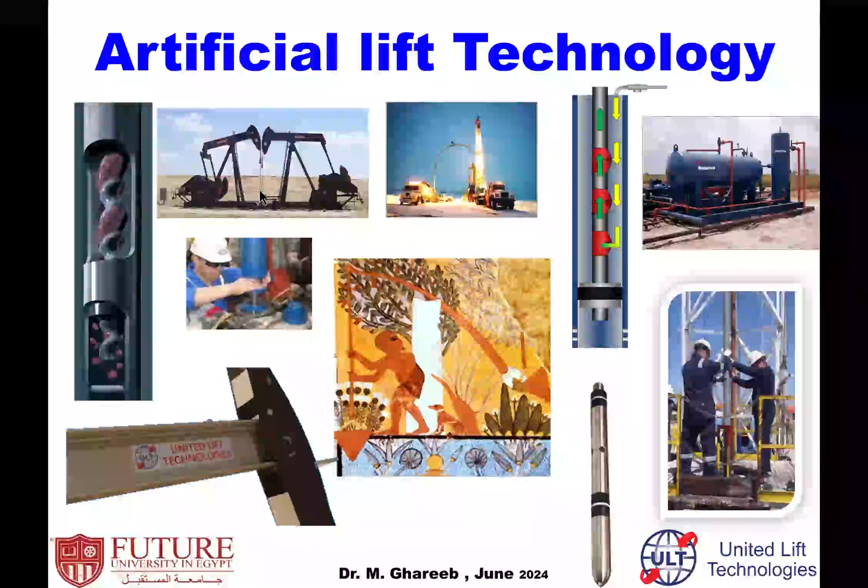Will I just continue from starting? Sorry for what happened yesterday about the power, getting disconnected and so on. Today we'll try to continue from where we stopped yesterday about one of the major forms of artificial lift. We said yesterday we plan to cover most forms of artificial lift systems. Yesterday we covered the first two, and today we plan to cover some basic general information about gas lift.

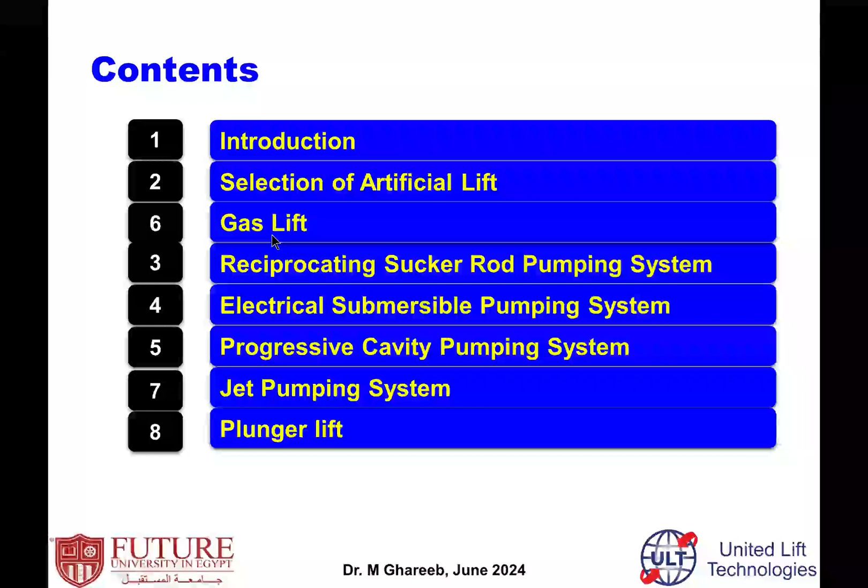If you are aware of this or know this, you'll be able to understand gas lift very well. Gas lift currently, as I said before, started to be one of the major artificial lift methods after the application in unconventional fields, especially deep fields, high gas-oil ratio wells, and so on. Artificial lift, specifically gas lift, started to be one of the most economical artificial lift methods for this type of field.

Yesterday we discussed what gas lift is and how it works, and how you start thinking about gas lift. It is one of the major artificial lift forms, especially for certain applications and certain areas. If gas lift is working for the well, it can be the most economical artificial lift. You can consider gas lift an extension of a flowing well. If you look at gas lift, it behaves like a flowing well, but with some artificial interference from your side to keep the well flowing.

Yesterday we said that for the well to be flowing, you must have bottom hole pressure capable of lifting the hydrostatic head of the fluid inside the tubing, inside the well, up to the surface. Plus, you need to overcome the wellhead pressure, a certain value of wellhead pressure, for the fluid to move from the wellhead to the facilities, whatever facility you have.

In some areas the facility is far, and there is plenty of oil in the fields, and the outlet pressures can reach more than 300, 400 psi. Then you need to have that value, plus all the pressure loss you have downhole from bottom to the surface. If you overcome these three items, then the well can flow. But in this case, it will flow artificially by using natural gas.

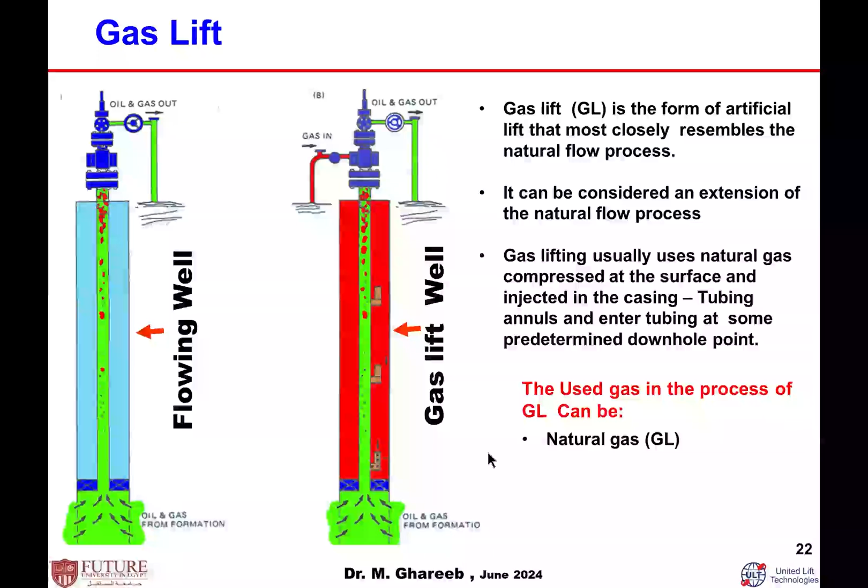What type of gas is used for the gas lift system? In general, the majority of wells use natural gas, either produced from this well or some other wells, or if you have a gas field near you, you can use it. Sometimes if the wellhead pressure of the gas field near you is sufficient, you may not need compressors at the surface.

Some wells in some areas use air, plus sometimes for very shallow wells, it's not common, but it can be. The main idea is to have some sort of gas to mix with the fluids in order to help the well flow to the surface, and it can be a mixture of air and gas. However, let us focus on the first one: using the produced gas or natural gas, what we can find. This is one of the main important things to think about regarding how to use gas lift.

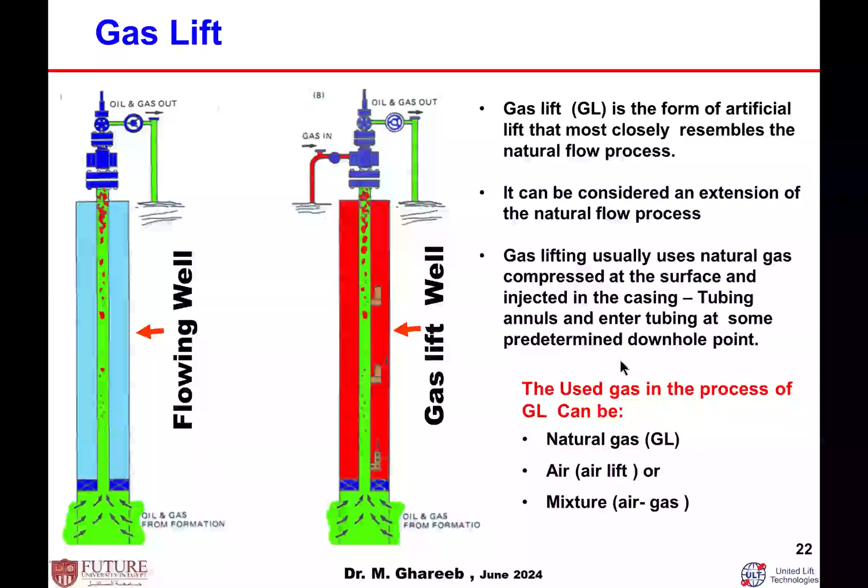In general, there is more than one type of gas lift, depending on the well, productivity, bottom hole pressures, how you want to produce the well, and the amount of fluids you have. In the market, generally speaking, there is what we call continuous flow gas lift, where you are continuously compressing and continuously injecting gas into the well. On the other hand, we have what we call intermittent flow gas lift, where you are injecting gas, stop, injecting gas, stop, and so on.

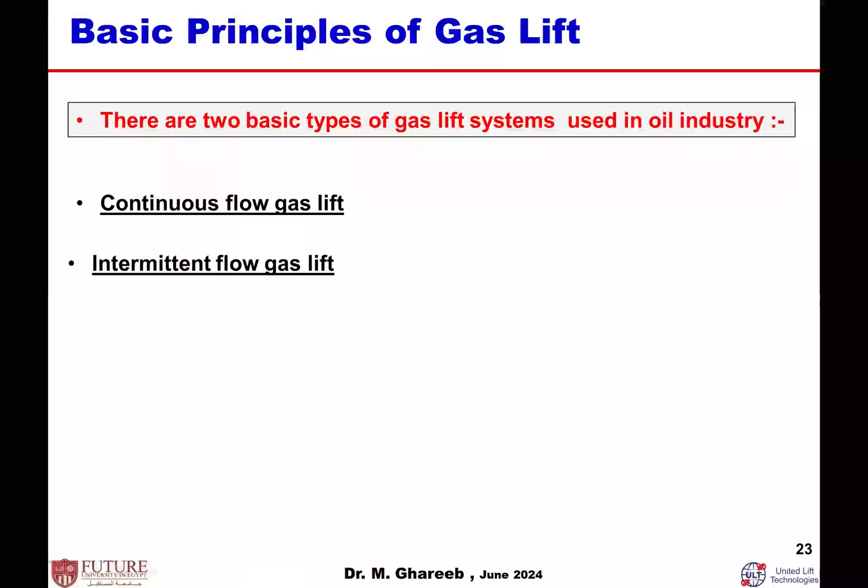How this type of technique or method works, I will talk you through. We have two types of gas lift systems: continuous flow gas lift and intermittent flow gas lift. What is continuous flow gas lift? How does the conventional gas lift, the continuous flow gas lift, work?

For the conventional gas lift, what we call continuous gas lift, as well as the other type, you are injecting gas from the casing. There are some cases where people inject from the tubing, but this is a different subject; let us focus on the principle. You are injecting gas, shown as the yellow arrow, in the annulus space between the casing and the tubing, and the gas enters the tubing through one of the valves, which I will explain, through a certain port, joining the produced fluids and lifting the fluid to the surface.

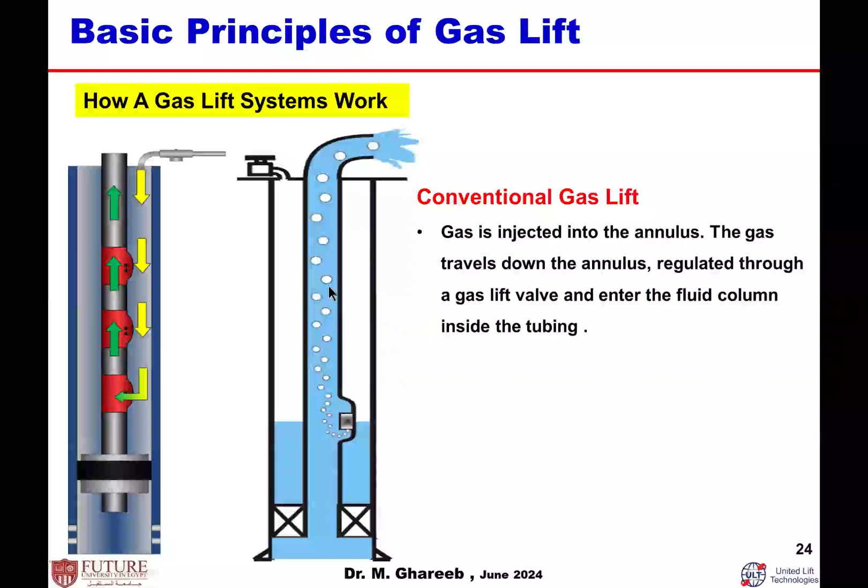If you look at this animation, usually in gas lift only one valve is open at a time, even if you have more than one valve in the well. The valve that is open is called the operating valve. If you are injecting gas in the annulus and the gas goes to the tubing through this port or valve, it joins the fluid in the tubing, reducing the hydrostatic head. One of the main purposes of that is reducing the hydrostatic head. There are also other techniques I will explain later for the gas lift, how to lift the fluid and produce it.

This is continuous flow gas lift. How does it work, again, in the continuous flow gas lift? The principle: we inject gas through the annulus, the gas enters the tubing through the bottom valve, joining the tubing flow to the surface. How is it working?

How is this simulated? How is fluid lifted? Only by reducing the fluid gravity, the density, the average gradient of the fluid, or what we have. This injected gas joins the formation gas or formation fluids, the produced fluid, to lift fluid to the surface. Usually there is one or more processes helping the fluids to flow from bottom to the surface. What is this process? First, the main idea and main concept in gas lift is reducing fluid density.

I have a fluid inside the well, for example water or oil, with gravity of the oil. If it is dead oil with API 40, the average gradient will be about 0.3 psi per foot. If I inject some gas and the gas mixes with the fluid, the average gradient will be less than 0.3 psi per foot. Then the hydrostatic head equivalent to the well depth will be much less. This is one of the main processes.

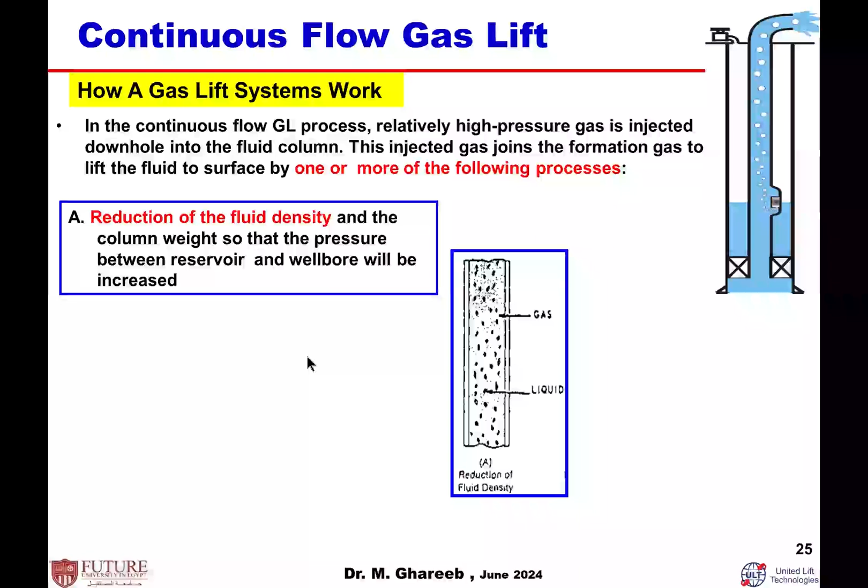What else? Yes, in the same wells, especially high gas ratio wells, deep wells and so on, this gas when it starts to travel upward, the bubble of gas starts to expand. When the bubble of gas expands, the expansion of the injected gas pushes the fluid, pushes the liquid ahead, up. Usually the gas is moving up, not down. Then when the bubbles of gas start to expand, it pushes the liquid or fluid up further, reducing the column weight more and more, helping fluids to move up.

Is there some other technique or process? Yes. Not only that, but as the gas goes up, the pressure decreases, and when the pressure decreases, the bubble of gas or slug of gas starts to expand, starts to get bigger and bigger. And when we have a big slug of gas inside the tubing, this slug of gas makes displacement of all the fluid above it, so displacement of fluid is caused by the slugging.

In the same well, you can find one of these processes or more than one. For sure, the first one is okay - you can find just bubble flow reducing the density of the fluid, or bubble flow with expansion of gas. If the gas starts to move up with a certain velocity and starts slugging, then you can have more and more processes.

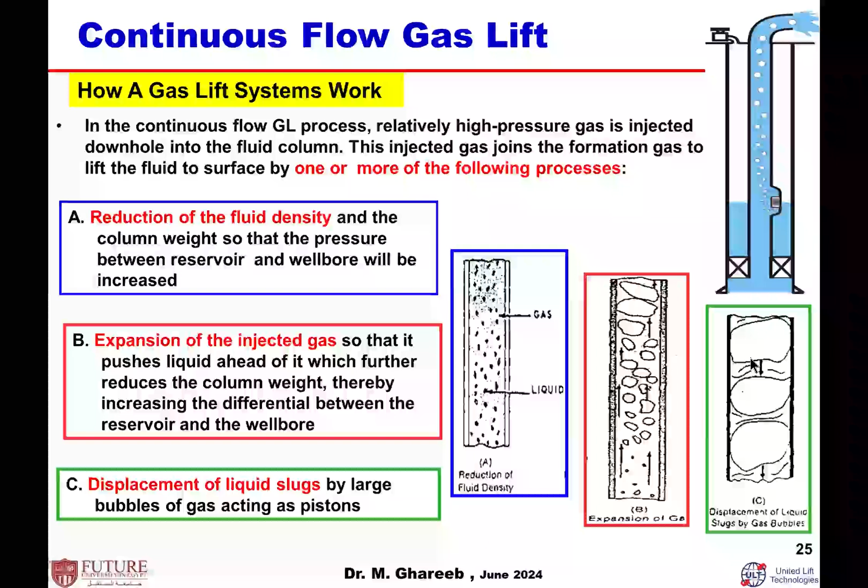Usually when you design the gas lift, you start to look at what's happening downhole for two-phase flow, because gas lift is an extension of the flowing well concept, since you're usually dealing with two-phase vertical flow for these wells. When we design with correlations, we know what process is happening in the well and how we can move from one process to another. If we want more than one process, we can control the amount of gas and pressure of gas going to the well and being injected. This is continuous flow gas lift.

We said that in gas lift techniques there are two techniques: continuous flow and the second one is intermittent flow. Continuous flow is used for high production wells, for wells producing continuously with good productivity and so on.

What happens if I have a well with low productivity? These wells only produce a very low amount of fluid, and this fluid cannot reach the surface. But the well is capable - the fluid inside the well has fluid gravity, viscosity, and so on. The design says yes, gas lift can work in that case. In this case, you stop the well and allow the well fluid to accumulate at the end of the tubing.

If you stop the well, there is a technique called build up. The well starts to build up - building up the fluid at the bottom, because the fluid is heavy. Fluid at the bottom, as a pre-designed amount, a head of fluid will be in the well. Then we know, when the fluid is built up at the bottom of the well, for example 100 feet, 200 feet, 300 feet, I have to inject gas in the annulus to push that accumulated fluid up to the surface.

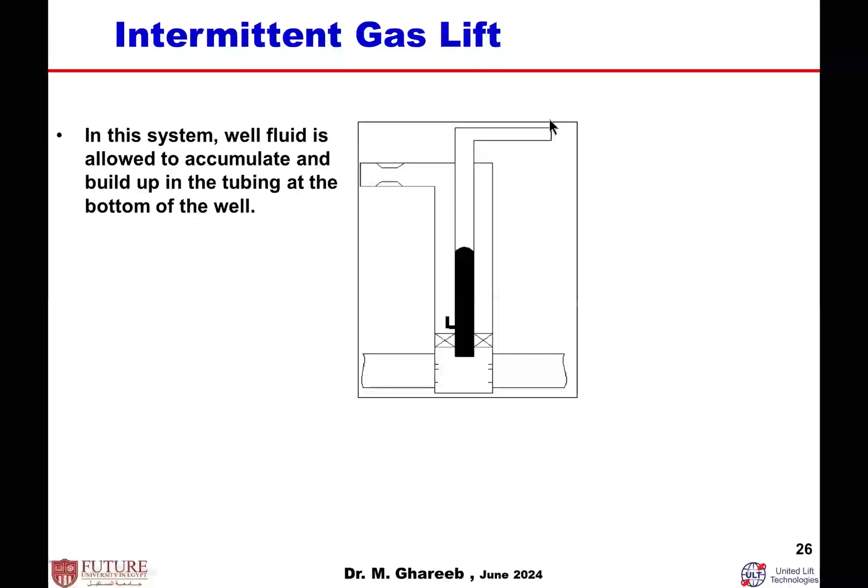When the fluid reaches the surface, the well is stopped, no gas injected, and there is fluid in the bottom of the well. When we have a certain amount of fluid in the bottom, I start to inject gas, the red arrow, inside the annulus, entering a certain valve at the bottom. This gas goes below the head of the column of fluid, pushing that fluid to the surface until it reaches the surface. There are valves there. Since the fluid reaches the surface, the well is stopped again. After I stop the well again, the cycle starts to repeat.

Usually, this type of intermittent gas lift is used for low production wells, low productivity wells. However, it's not economic, not efficient, because in most cases you have a lot of fluid slip back. When you are pushing gas, it's not working like a plug, it's a fluid, so the gas can move through that flow, and it's not very efficient. Sometimes it's used for shallow wells, low productivity wells, when other forms of artificial lift may not be economical. Sometimes it's combined with other types of artificial lift, like plunger lift, plunger assist. However, this is the second technique or process of the gas lift system.

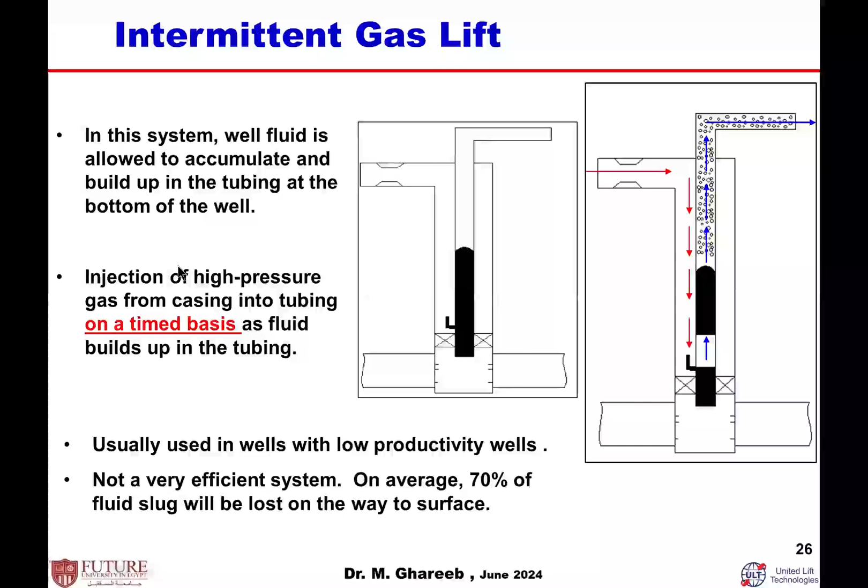This slide explains the process, how it works. If you look from the left side, at the bottom there is fluid just accumulated. At the surface, immediately before injecting gas, there is fluid in the bottom, so the surface control valve is closed. Then, after a certain volume of fluid accumulates inside the well, the surface control valve starts to open and allows the gas to be injected inside the well. The gas goes below the slug, and after the gas goes below the slug, it pushes the slug to the surface.

Second, during the injection operation, when the slug reaches the surface, there are sensors at the surface that say this is now the end of the slug or the gas. The plug moves from the wellhead. The surface control starts to close because the well is now completely filled with gas. Why keep injecting more gas? Because the fluid has already reached a certain depth or place in the wellhead, and since there is no more fluid, or the plug has moved, it is now only sensing gas. When this closes, it allows the well to be stopped. After the injection, when the well is stopped, the flow starts to build up again, and the cycle repeats. This is what we call intermittent gas lift.

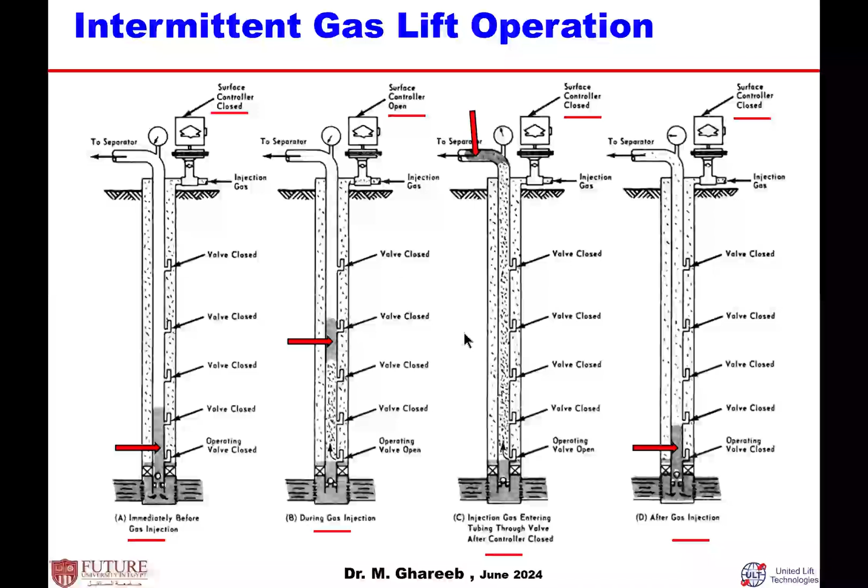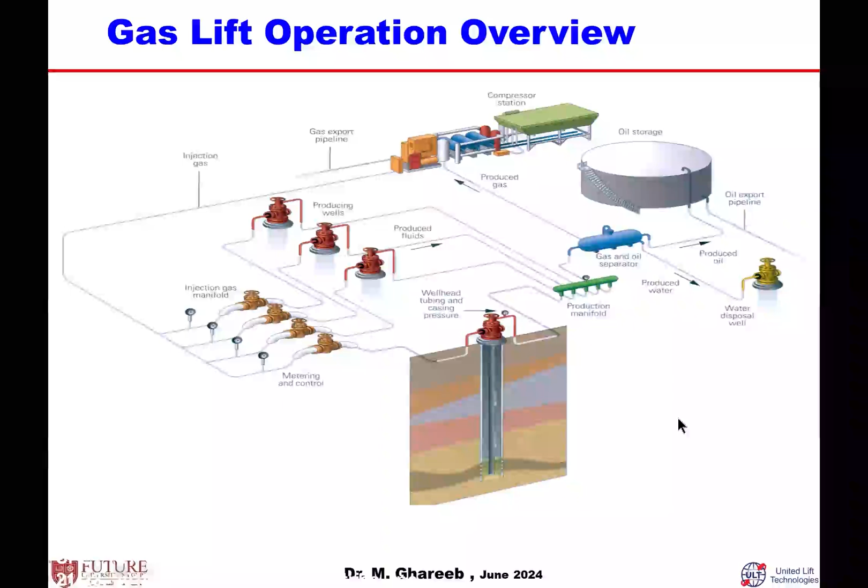Okay, based on that, based on why I use gas lift, based on what I mentioned about gas lift, for sure there are some advantages, some limitations, and some disadvantages of gas lift.

As I mentioned, the gas lift is an extension for the flowing wells. There are no moving parts, no moving equipment inside the wells. The gas lift can handle sand and whatever else, even deviated wells, horizontal wells, whatever type of wells. There are no restrictions inside the wells for flow to move in the tubing, because there is no mechanical movement.

Gas lift is a more flexible type of artificial lift for design rates. If I design the well for certain rates, based on well productivity, the amount of fluid, water cut increase or decrease, and so on, I can control the injecting volume and pressure of gas, and even the place and depth where I need to inject the gas, at what valves and depths. This gives more flexibility with gas lift.

For that reason, one of the main important things for gas lift is optimization. It really is one of the artificial lifts that requires continuous optimization and continuous monitoring of what's going on downhole - whether I use the gas at best efficiency, in the best economical way, and so on.

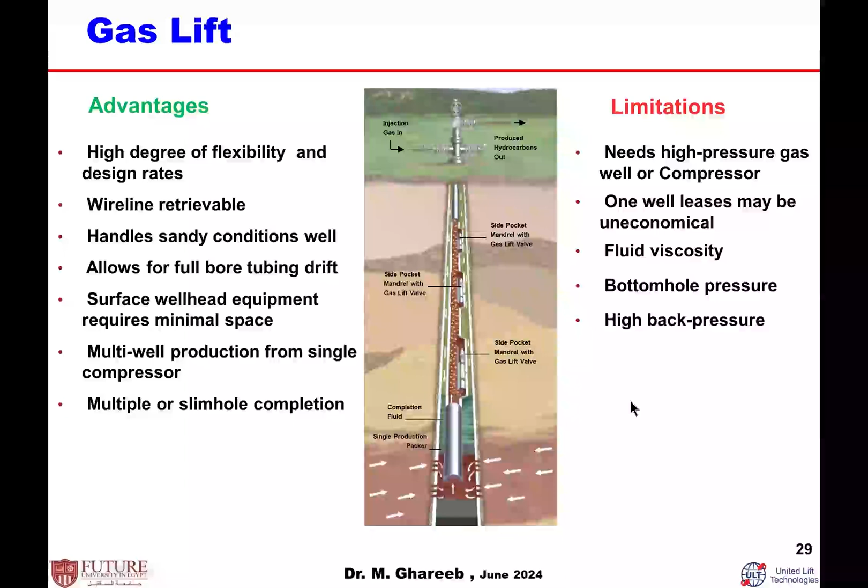What is the equipment used for gas lift? What type of equipment do we usually use to gas lift the well? Since I said we run this well with artificial lift, there must be certain equipment used to artificially lift that well, and for any type of artificial lift, that means we have surface equipment and downhole equipment.

For gas lift, what equipment do we have? I'll show you these slides to simulate what the gas lift setup is, what we have at the bottom of the well, and what we have at the surface.

For the gas lift components, what components do I have? What is the downhole component? Downhole means all the equipment in the well below the wellhead, down to the wells. Whatever I find in the well, we call downhole equipment.

What's the downhole equipment for gas lifted wells? Mainly, we have gas lift valves. Some valves, because I inject gas, but I need to have some control over where the gas is injected. Where do I need to inject the gas? I need to inject it at a depth of 1,000 feet, or 2,000 feet, or 3,000 feet, or whatever.

At what depth do I need to inject the gas? What volume do I need to inject? I need to have some sort of control, something to control the amount and the location of gas being injected downhole into the well. This is what we call the gas lift valve.

How is the gas lift valve installed inside the well? The gas lift valve, as shown in this picture, is just a small piece of equipment. It must be fixed inside the well, and at the same time it must allow the fluids and gas to communicate.

There is some sort of communication between the fluid in the annulus and the fluid in the tubing. This gas lift valve is installed in what we call a gas lift mandrel.

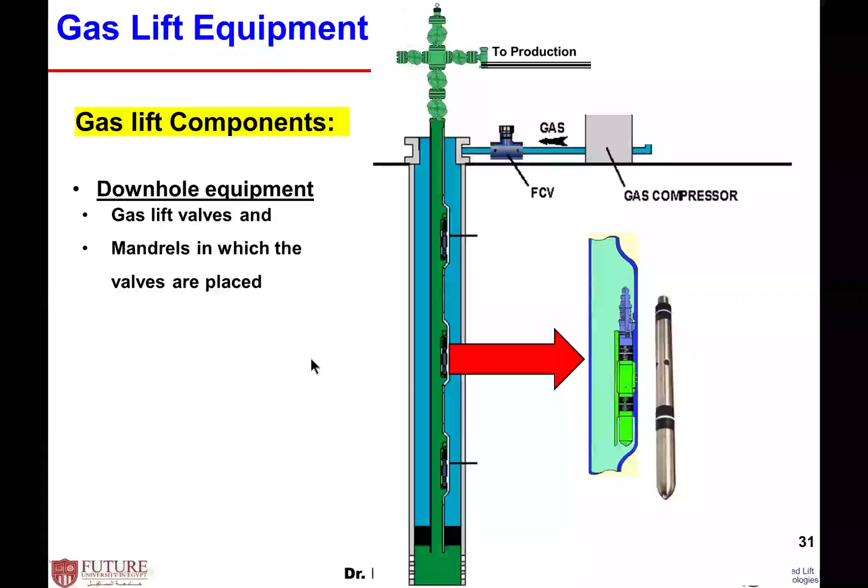In the downhole, mainly there are some accessories I can use sometimes in such oil wells and so on. This is gas lift equipment. I am not talking about completion now, I'm talking about the gas lift equipment specifically.

If you look at the gas lift valve with the gas lift mandrel, the red color represents the gas, this is the gas lift valve, and this is the gas lift mandrel, just zooming in on that one.

At a certain delta P pressure between the tubing and the casing, the valve opens, allowing gas to enter the tubing. When it enters the tubing, it makes the fluid lighter, lifting it, which was one of the processes I mentioned before. At the surface, remember we said I must have a control.

I must have something to control whether the well is open or stopped, the volume of gas, the pressure of gas being injected, and so on. Then I need to have a compressor or high pressure line.

The compressor or high pressure line usually isn't just for one well. A compressor, most of the time, serves a couple of wells or more. However, I need to have a source of high pressure gas. High pressure gas comes from a line, from wells, or from compressors that compress the gas to give me gas at the wellhead with a certain pressure value.

Plus, the wellhead for gas lift is very simple. It's just a Christmas tree and so on, plus control valves or whatever, just to control flow and control pressures and so on.

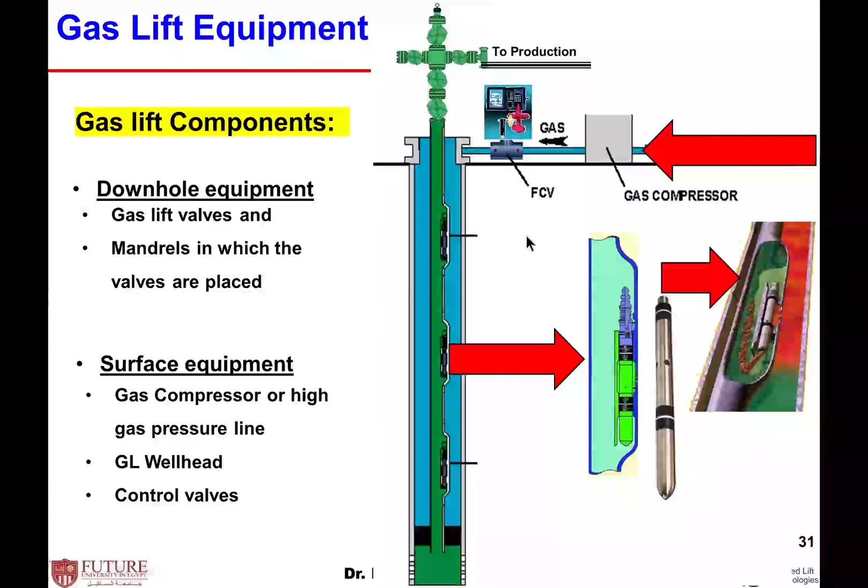Let us focus a little bit more on valves, gas lift valves and gas lift mandrels, and why we need a gas lift valve. This is a cross section of the mandrel with the valve installed inside it. We need the gas lift valve to provide communication for the fluids between the fluid in the annulus and the fluid in the tubing.

I have to communicate between the fluid in the annulus and the fluid in the tubing, with control over when it's open, when it's closed, when I need communication, and when I need isolation to stop it. The valve controls the flow of injected gas into the production tubing. I need to inject gas at that depth or stop, inject at that depth or not, or deeper or shallower depths.

The valve operation depends on a preset opening. Since the valve is controlled, I have to preset it in the workshop using certain techniques, which I will show you later. The valve should open if the pressure in the annulus is higher than the pressure in the tubing by a certain value, and should close if the pressure is low. If the pressure rises further, the valve should open or close accordingly. This opening or closing is based on the preset in the workshop.

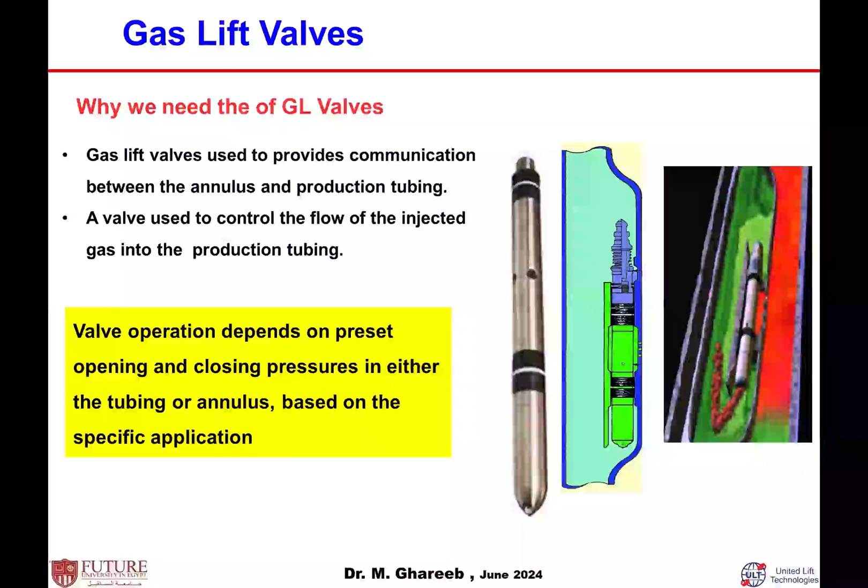If you have a delta P across the valve from the casing and tubing, you need to open or close. So the valve operation depends on preset opening and closing pressure in either tubing or casing, based on the delta P from casing to tubing or tubing to casing. There are different valves and different techniques for using this.

Each gas lift well or gas lift completion will have more than one valve in the well. The well may have 5, 6, 10, or 15 valves. Why do I use more than one valve inside the well? Are all the valves working at the same time? What is the reason for using these valves?

Usually, all the valves inside the well are such that only one valve is open during operation and the rest are closed at the same time. When one valve is open, the other valves should immediately be controlled, based on the preset pressures set for the valve in the workshop.

All the valves inside the well have certain names. The valve continuously operating to inject gas, which is open and allows gas into the tubing, is called the operating valve or orifice valve, and it's the bottom one. All the valves above it are called unloading valves.

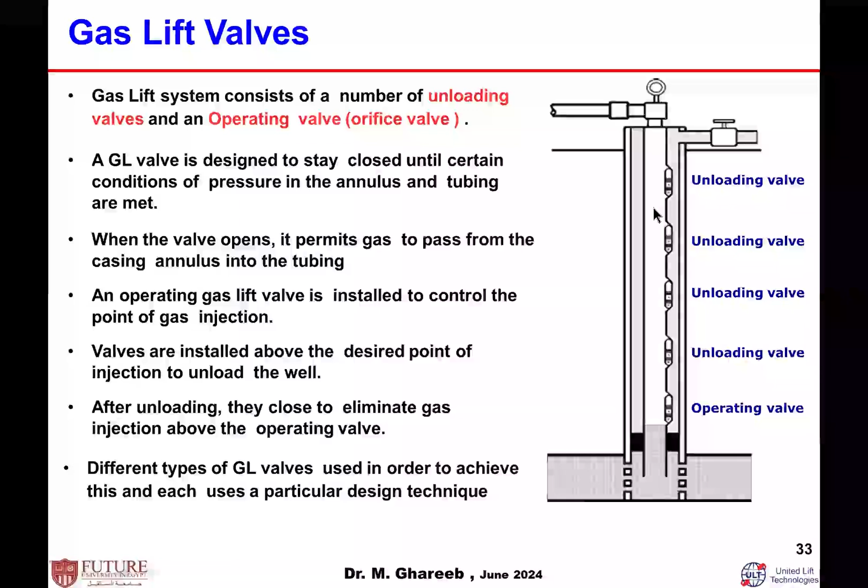There is a slide later on, we'll go through this in detail.

Is there a different type of valves in the market? Yes, there are different types of valves, but there is a main common technique, the main common valves used in the market. There are some smart valves and some other valve techniques as well.

The most common valve, the first valve, is called the injection pressure operated valve, IPO. Injection pressure operating valve responds to injection gas pressure. That means this valve is open or closed based on the pressure of the injected gas in the annulus, the pressure of the injecting gas in the annulus at the valve depth.

The second valve is called production pressure operated valve, PPO. Production pressure operating valve responds to flowing pressure, based on the flowing pressure inside the tubing at the valve depth.

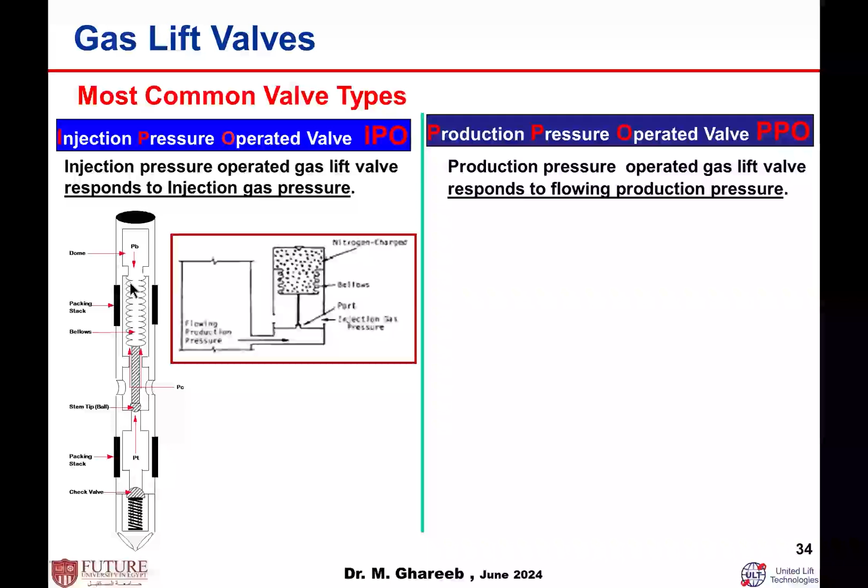If there is no pressure from outside, this pressure pushes this port, and the port at the bottom will be closed. When the gas pressure outside this gas lift valve reaches a certain value, higher than the pressure inside the bellows, it lifts this port open, and then you allow the flow to go through, and so on.

I keep this here just so you understand how this valve is working, and the difference between this one and others.

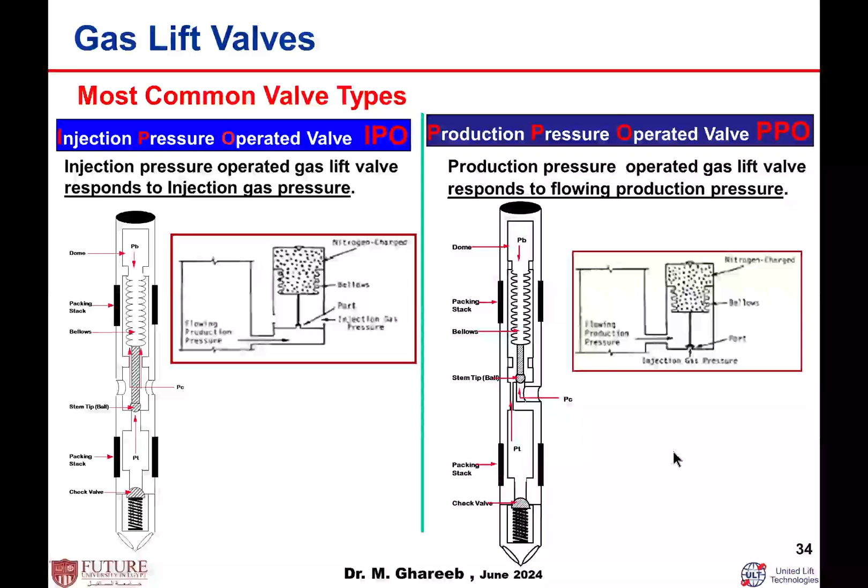I said the second part of the downhole equipment, the gas lift equipment, is the mandrel. The mandrel is where the valve is installed. I install the valve and the mandrel, then the valve is installed inside the mandrel.

Generally speaking, in the market there are two types of mandrels. Just like there are different types of valves, there are mainly two types of mandrel: one is called conventional mandrel, and the other is called retrievable wireline mandrel. In a conventional mandrel, the valve is installed in the mandrel, but not from inside the tubing.

The valve is installed in the mandrel before I run the mandrel, before I run the completion in the wells. Usually this type of mandrel is used for shallow wells and so on. It's not expensive, but it's not economical from the operation point of view, because in case I have some problem with the valve, I need to change it for some operation.

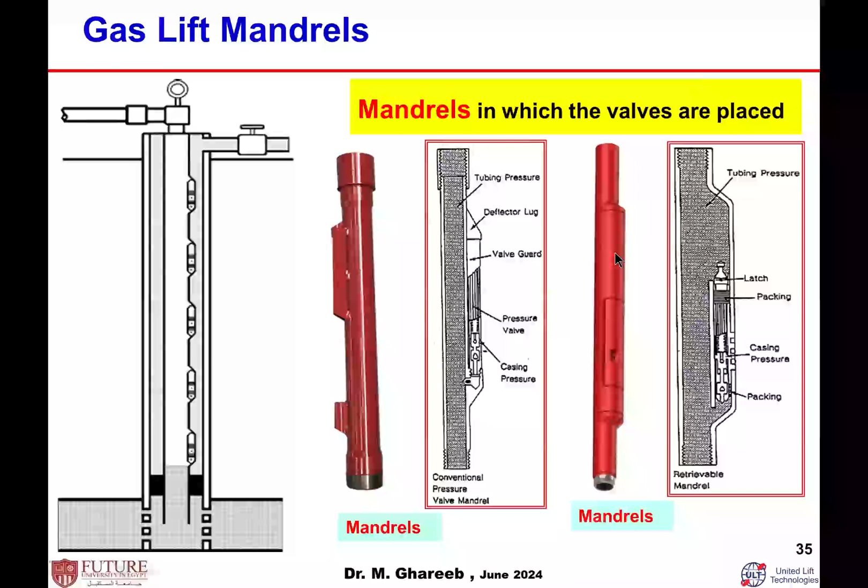So I have to pull the completion completely to retrieve the valve and change it. The main common one is what we call retrievable side pocket mandrel, or conventional pressure valve retrievable side pocket mandrel. In this one, you connect to the tubing with a certain configuration, while the valve is installed inside the mandrel, inside the tubing. In case I want to retrieve the valve with a slick line, I run in, catch the valve, retrieve it, make repair or replacement, whatever, and rerun again. This is one of the main common mandrels used in the market.

Let us back up again about the unloading sequence, how to unload the wells. I think to unload the wells means when the well is completely full with liquids, then in this case we are running the gas lift with different gas lift mandrels in order to reduce the amount of flow, the pressure of gas needed to inject, and restore the well to production. After the well is completed, usually, as I mentioned before, you have a certain flow inside the tubing and inside the casing. The gas lift pressure has a certain availability in the field, but in most cases it's not generally high enough to lift all the hydrostatic head inside the well.

That's usually not available, or it would require a very high compressor to do that. In this case, a series of unloading valves at different depths inside the well reduces the amount or value of pressure required to unload the well. This is one of the main important design steps when we design the gas lift, how to design the valve spacing, the valve placement inside the well.

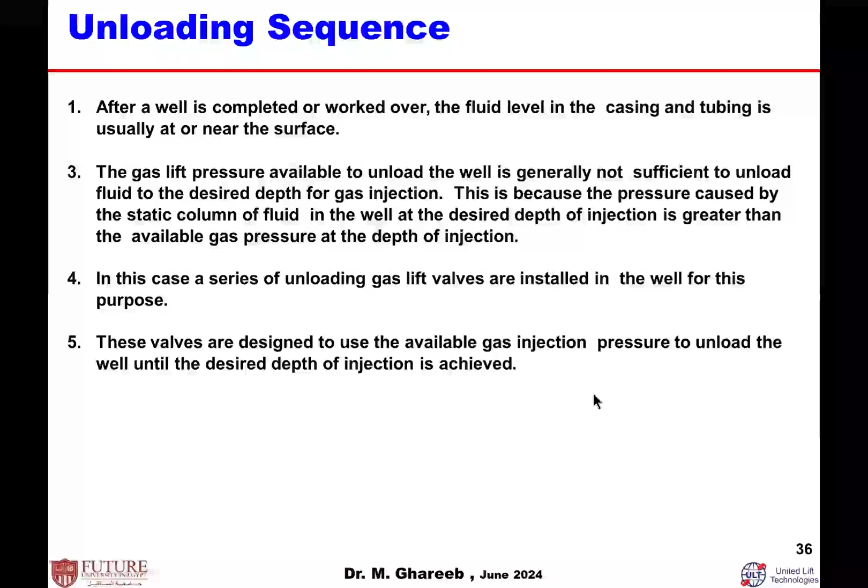In this case, the valve is designed just to use what's available of gas. Based on my availability of gas and the pressure of gas, I do the design and space the valves inside the wells. This is just a first graph, taken from some Schlumberger presentations.

These graphs show, for the left side, one well that is full with liquids in both casing and tubing. If you look at those liquids, the pressure at the bottom against this liquid is what we call the shut-in bottom hole pressure. Then the pressure in the casing and the pressure in the tubing are almost the same. The gradient in the casing is the same as the gradient in the tubing. The top one is the casing pressure, and the bottom one here is the gradient, the pressure of the fluid inside the tubing. This is the required wellhead pressure to get the fluid to move to the surface.

What does unloading mean? How do you unload? How do you reduce it? If I want to lift all that fluid, I need a pressure at the surface equal to 7,000 psi, because the annulus will be full of gas and the tubing will be full of liquids. In order for that gas to push the liquid, since the gas density is very, very low, everything should be full of gas. Then the pressure here should equal the hydrostatic head of the pressure inside the tubing. So if there is one valve and I need to lift this fluid, I need a pressure of at least 7,000 psi. But generally 7,000 is very high.

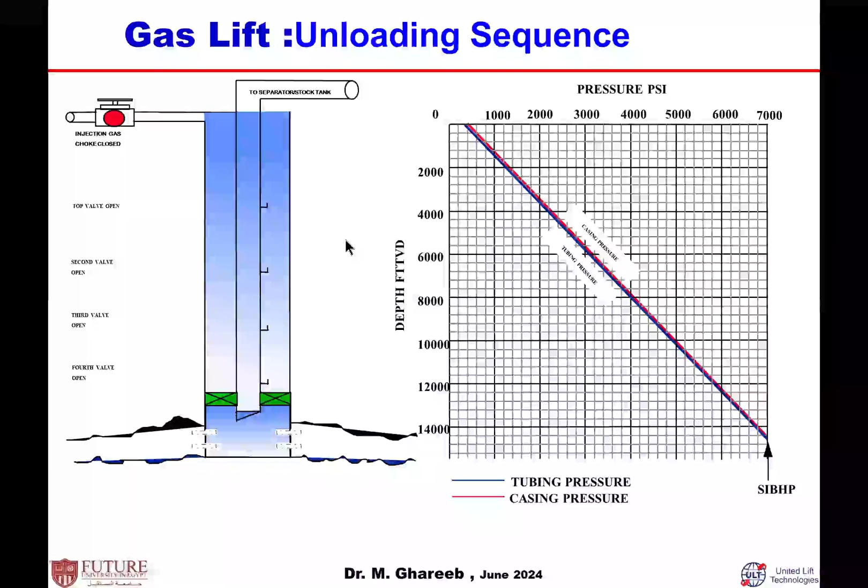For that reason, we use more than one valve to unload the well. How can that reduce the amount of wellhead pressure? When we start to inject gas in the casing, what happens here?

In this case, in order to reach that, the pressure at the bottom is still the same, but we're compensating with the equivalent pressure of the liquid inside the tubing against the annulus gas. The wellhead pressure of the injecting gas reaches more than 1,000 psi, just to push this amount of fluid inside the tubing. I'm still above the first valve, so there is no gas entering the tubing.

When I start to increase the gas pressure, and reach around 2,000 psi, I get the gas to the first valve. When the gas reaches the first valve, the valve opens, allowing the gas to enter inside the tubing.

When the gas enters the tubing, it mixes with the fluid, and the average gradient of the fluid from the depth of the first valve up to the top becomes less than dead oil. This will be lower. If you look at this blue curve, the gradient starts to decrease. The pressure moves a little bit, because the hydrostatic head is now only the head of the liquid below, plus the head of the two-phase flow above. The equivalent pressure is now less than 7,000 psi at the bottom hole.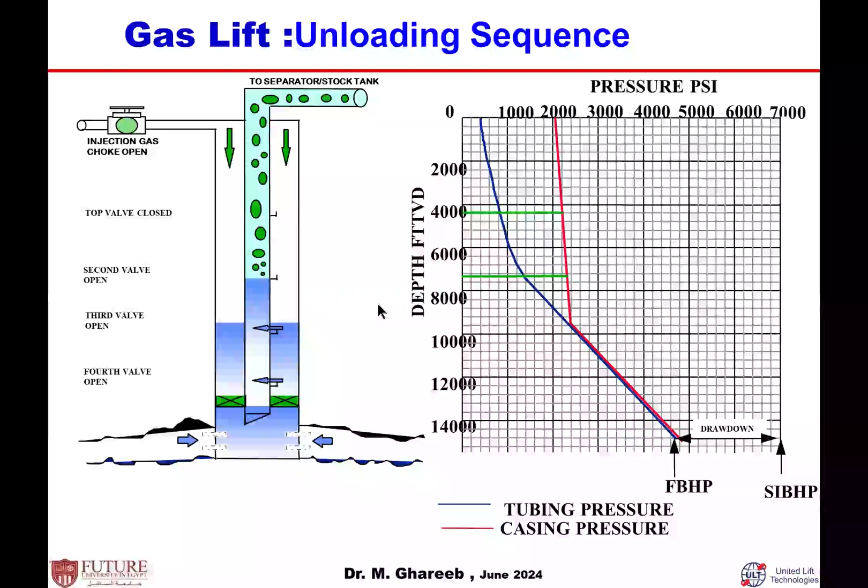It starts to produce some fluid entering the well because the pressure is decreased, and meanwhile I continue to inject gas, until the downhole pressure is reduced to the pressure I already designed before. When I reach a certain depth, I consider this an operating valve, and the well starts to be produced.

This is the ideal case. Remember at the beginning I said, in order to keep this well flowing and lift the fluid, I need almost 6 or 7,000 psi. Now I need only 2,000 psi. See how much saving in pressure at the surface when I'm using more than one valve inside the well.

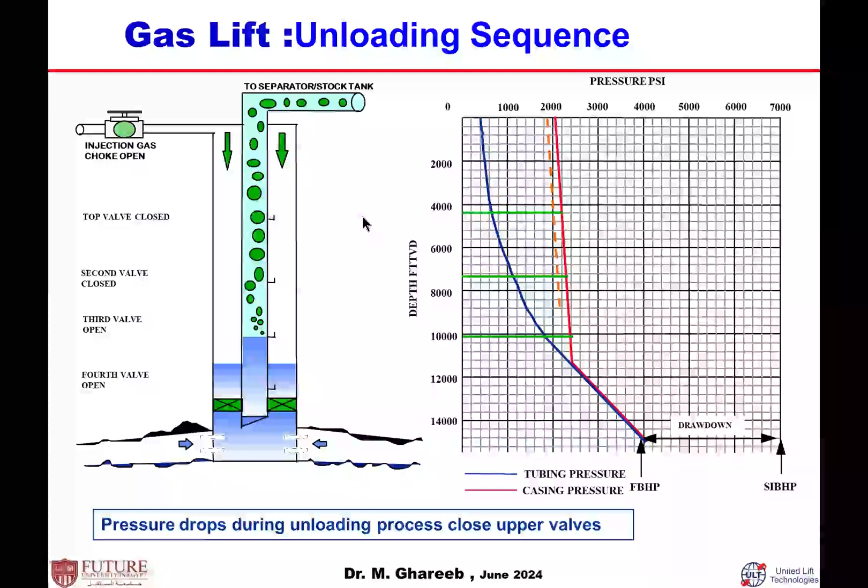This is just some graphics, not what we're talking about now.

In order to design the gas lift or gas lift valve system, for sure you need more information. Remember yesterday I said when selecting artificial lift, you need to consider all the aspects of the well, the reservoir, the wellhead facilities, the criteria of the fluids, and so on. For design of continuous gas lift, the more information you have in front of you, the more efficient and better your design will be.

I need to know the tubing size inside the well in order to know the two-phase flow pressure loss, what size of material I have to run, what size of valve, the casing size in the annulus between casing and tubing, and the depth to the center of perforation. What's the depth of perforation? Because this is a flowing well, an extension of flowing wells, I need to know very well the bottom hole flowing pressure, the oil API, and consequently the gravity and viscosity.

What's the formation gas oil ratio? Because I will be injecting gas. What volume of gas do I need to inject?

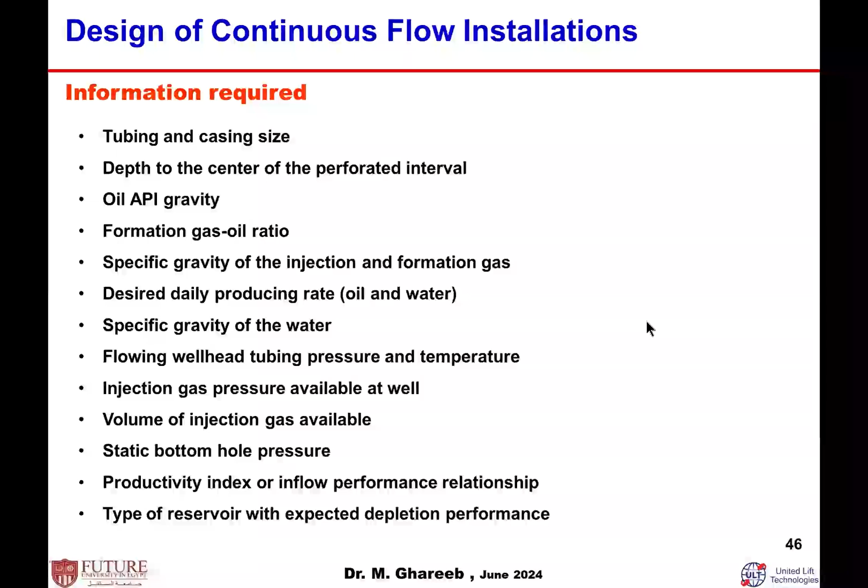Since I'm working with gas, the gas is sensitive to pressure and temperature. Remember the gas law has two main terms, pressure and temperature, affecting each other on the gas. Injecting gas pressure availability, if there's a gas field near me or a compressor, what size compressor, is it new or already in the field, do I have to rerun for new wells, volume of gas availability, bottom hole pressure, productivity index, type of reservoir - this is the minimum information I need when designing a gas lift system.

Gas lift design has different methods used. There's a lot of software in the market, some commercial general software that is very efficient, and some private, in-house built software. Many major service companies have their own software to design gas lift valves.

Most of the different methods incorporate different design philosophies based on what philosophy you have and what type of valve you have - remember, I said there's an injection pressure operating valve or a production pressure operating valve. It also depends on what type of well you have and what type of correlation, because changes in fluid parameters and concentration, like water, may require correlations for the two-phase flow inside the tubing, which may change with time. For gas lift especially, you have to simulate what's called nodal analysis - what type of fluid, what restrictions, where you need to reduce the restricted pressure, and so on.

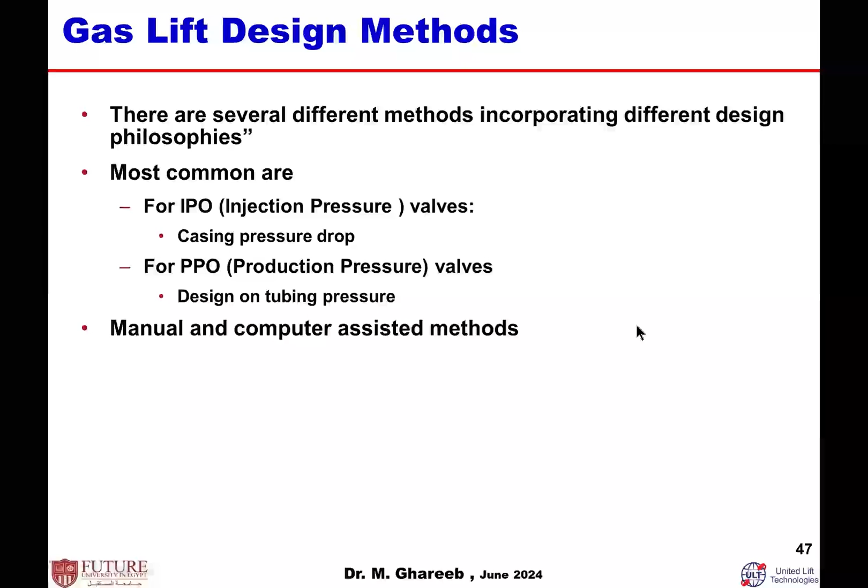Sometimes manual design is used, but it's not efficient - it's used for shallow or small wells, but for critical wells, no, you need computer-assisted methods, programs like Prosper, PipeSim, and so on. There's a lot of software used in the market. Since most of you are students, I'll give you a quick hint about the manual methods and how they are designed, while the software depends on that.

For the manual method of gas lift design, I need to determine how many valves I have to run in the well, at what depths each valve will be - the first valve, second valve, third valve - and what the space is between the first and second valve. Each well is unique, with a unique design and system, depending on all the information presented in my previous slides.

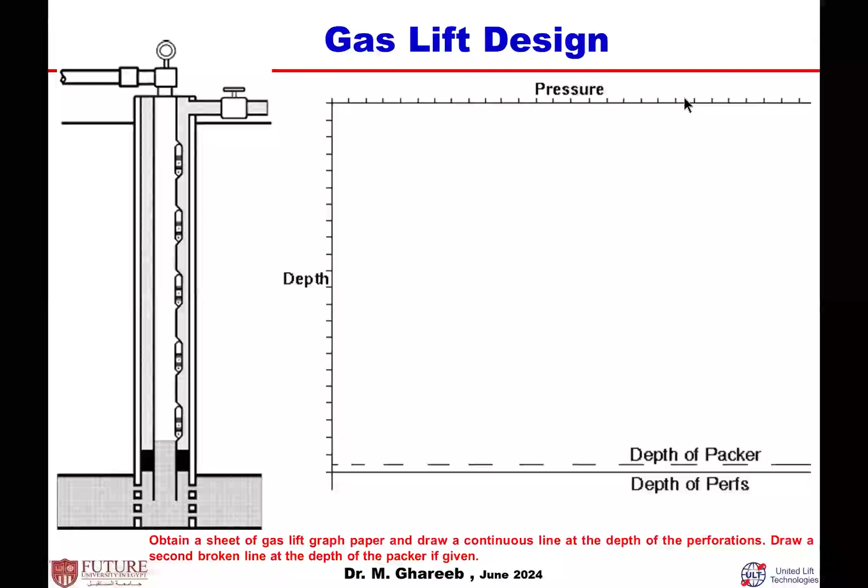You need to start with a graph like this, on a piece of paper. At the top, you have a line representing the pressures, and on the vertical axis, a line representing the depths, and at the bottom you need the depth of the perforation and the depth below which you must not run the last valve. This is what's called a gas lift graph, with these two axes, horizontal and vertical. The first thing on this graph is to determine the gas availability, the gas pressure available, because based on that availability I design the system and the valve spacing based on the availability of gas pressure and volume.

Let us consider the injecting gas pressure at the surface, and what the injection gas pressure will be at depth, due to changes in pressure, temperature, and gas gravity. Not a big difference, but you construct a line like this one, which can be determined from simulation runs if you want, or from empirical charts.

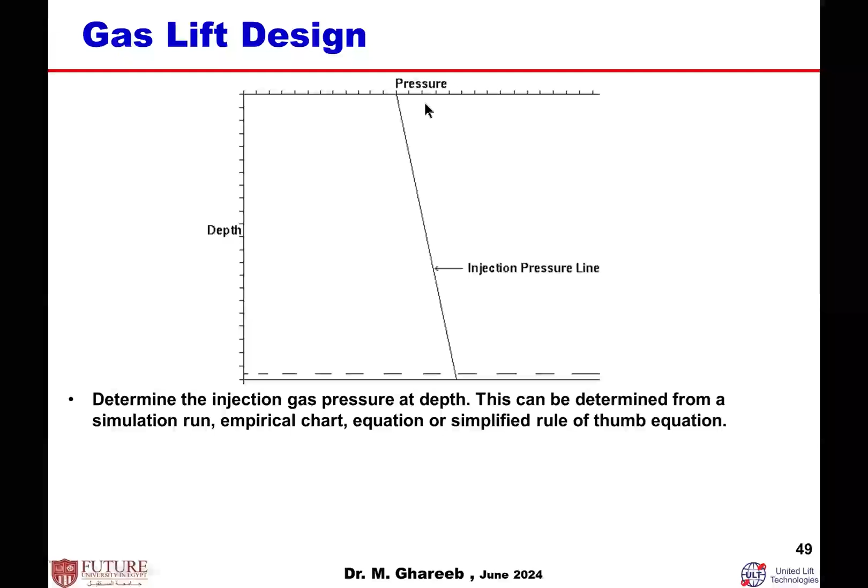There are empirical charts depending on gas gravity, gas properties, temperatures, and so on, and some simple equations can be used. Based on the maximum pressure available at the surface, you find the corresponding pressure if injecting downhole. This represents the injecting gas pressure line.

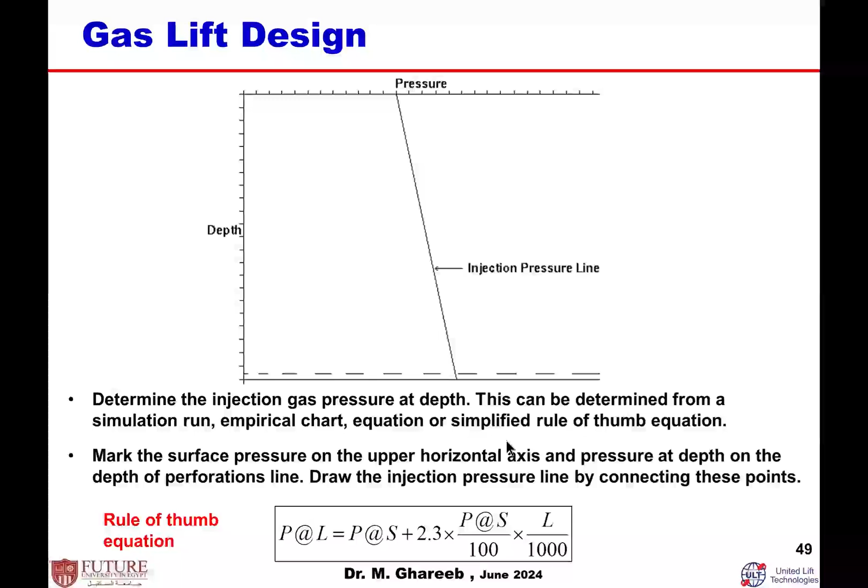Then I construct this line. For the second line, I need to know what type of fluid is inside the well, whether it's water or oil, and its gravity. Then I draw a line from the upper left corner of the gas lift paper, representing the static fluid gradient inside the well. The static fluid gradient is a simple technique: it equals the fluid gradient multiplied by the depth, and so on. Then you have the second line.

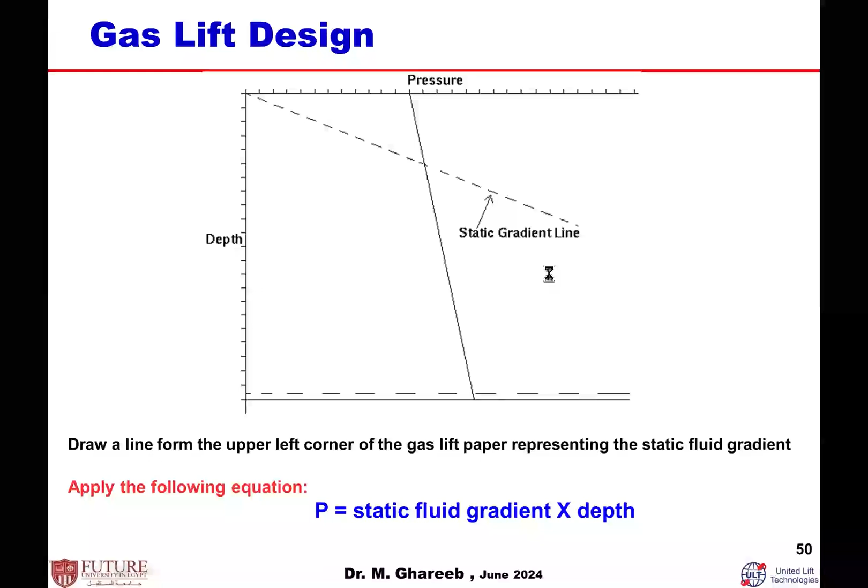Now we have two lines: one represents the gas I will inject, and one represents the fluid in the well. What type of fluid is in the well? What you call the static gradient in the well.

When I start to do that, I also need to know what the unloading gas liquid ratio should be. This is equal to the available injecting gas divided by the desired production rate. I have a gas supply and a production rate, and I have to lift it from this well. This is what we call designing how much gas I need to inject to lift this flow.

You have to note that you are lifting a dead column from this well, with no gas inside it. For example, if I want to produce or lift 600 barrels a day from a certain well, and the available gas rate from the compressor at the well site is 1,200 MCF per day, then the injected gas liquid ratio is the division of these two, equal to 2,000 standard cubic feet per barrel.

How do you determine that? Usually you use two-phase flow correlations like this one, which can help or support you. You need to select the proper, suitable two-phase flow correlation, or flow gradient curve, to use.

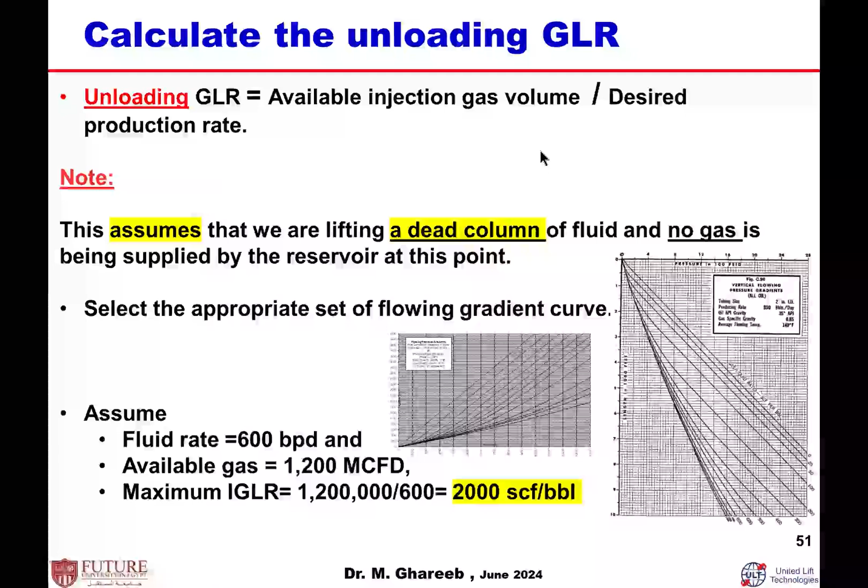Each curve represents sometimes a certain correlation at a certain gas liquid ratio. Then I construct the gas lift diagram with the gas pressure line and the hydrostatic line. Based on the previous curve, I select how much my gas liquid ratio should be—for example, 600 as in the previous design. This is the well fluid and completion situation I found: I produce 600 barrels per day with 2 7/8-inch tubing, and so on.

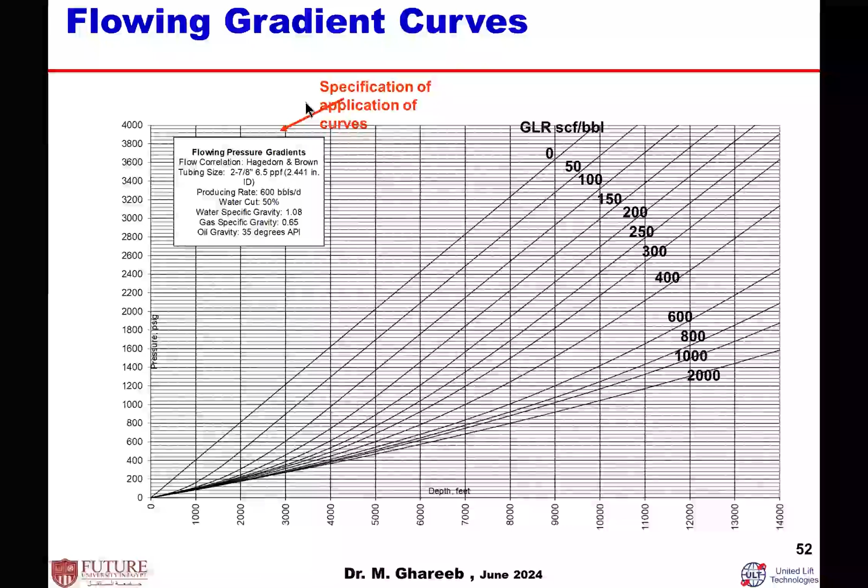Then I select this curve. You see that curve at 600 barrel per day, and I took this curve exactly and put it in the same chart. But it's not starting from zero, it's starting from the well head pressure. I stopped at the well head pressures, and I overlay this gas lift paper on the curve, and the curve represents the calculated unloading gas liquid ratio.

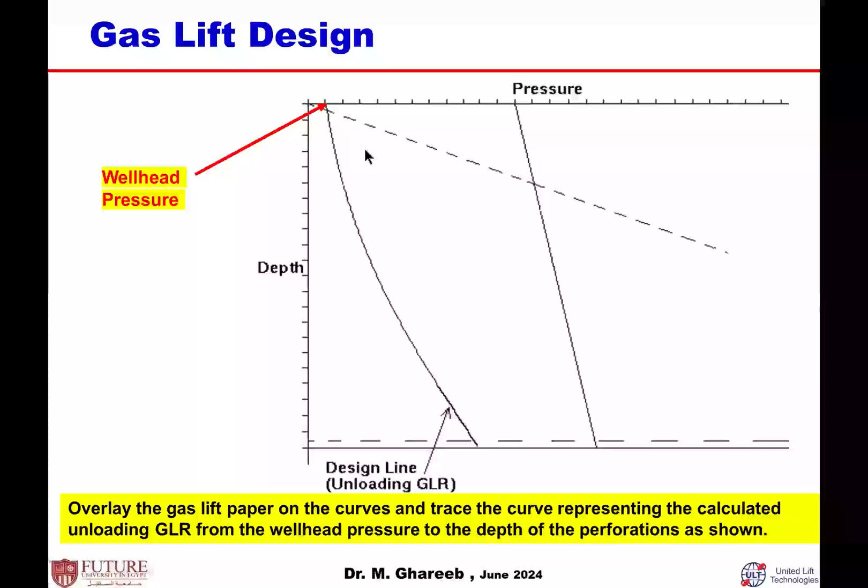Then I have 3 lines on this curve. These 3 lines let us determine how we select the first valve, second valve, third valve based on these 3 lines. If we are using a triangle and constructing a line parallel to the static gradient of that flow, this dash line, we move that line until it reaches the well head pressure, in line from the well head pressure until this line is constructed, or just intersects with the gas pressure line.

Then in this case, you construct a line parallel to the static gradient starting from wellhead pressure at 0 depth at the surface to the point where it intersects with the casing gas pressure. This solid line, until it reaches here - this theoretically should be the depth of the first valve. But due to downhole conditions, sometimes it changes downhole.

We don't know exactly the pressure, temperature, what can affect efficiency. We take some safety factors. Safety factors depend on the type of valves, the type of gas, the type of wells, a lot of things. But in general, according to some situations, if you don't know, you use a 30 psi safety factor to install the valve.

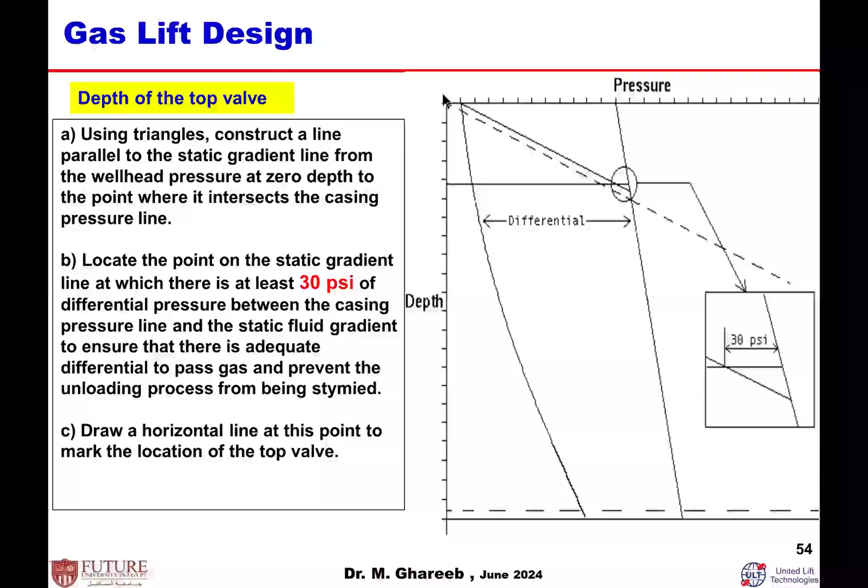Okay, this is the same technique used for the second valve, but I have to remember that this valve now is working with a pressure not at the surface temperature, but at the temperature at depth. Then I have to know what the temperature is at the wells. I also have to draw the temperature gradient curve in order to know, for example, the first valve is working at 100 degrees Fahrenheit.

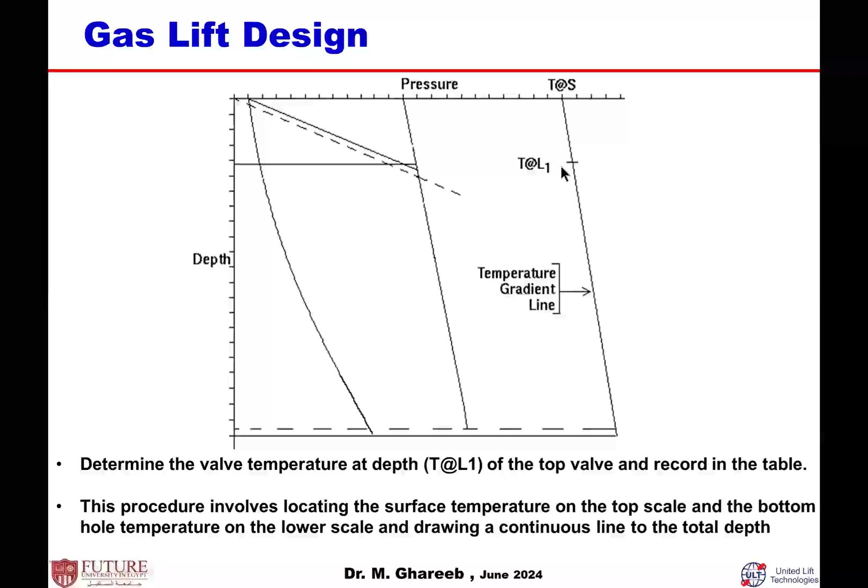Then when I have to preset the valve pressure at my workshop, the pressure inside the valve, I have to consider these pressures should open and close at this type of pressure, this type of temperature, and so on. Because if I ignore that, the condition of the pressure will be changed because the valves will be full of gas and so on.

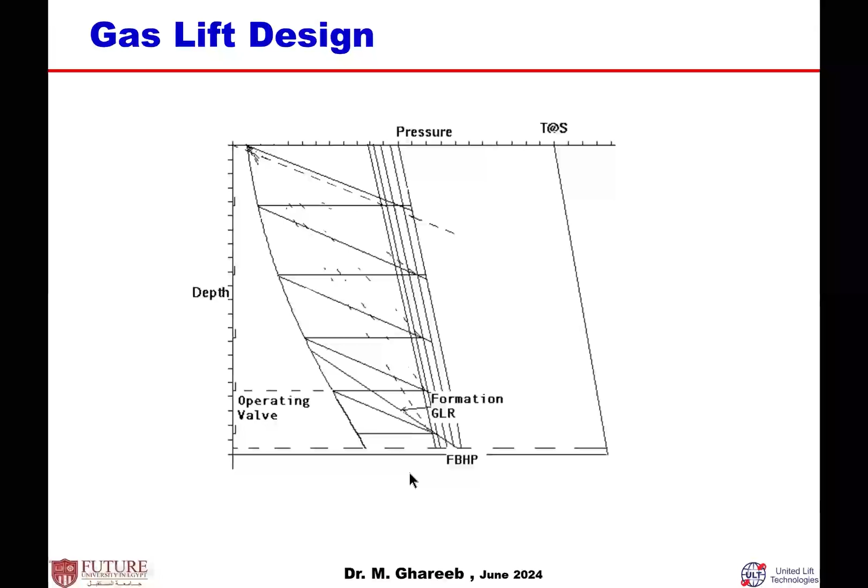With the same technique, you determine the second valve, third valve, fourth valve until you reach the bottom. However, this is manual and not many people use it. This is just for educating students, in order to understand the software and so on. But however, there is plenty of software, and the software will guide you through each point you have to consider in the design.

It will ask you about what type of valves, who's manufacturing this valve, what size of valves, what total depth you have in the wells, what production is required, and so on.

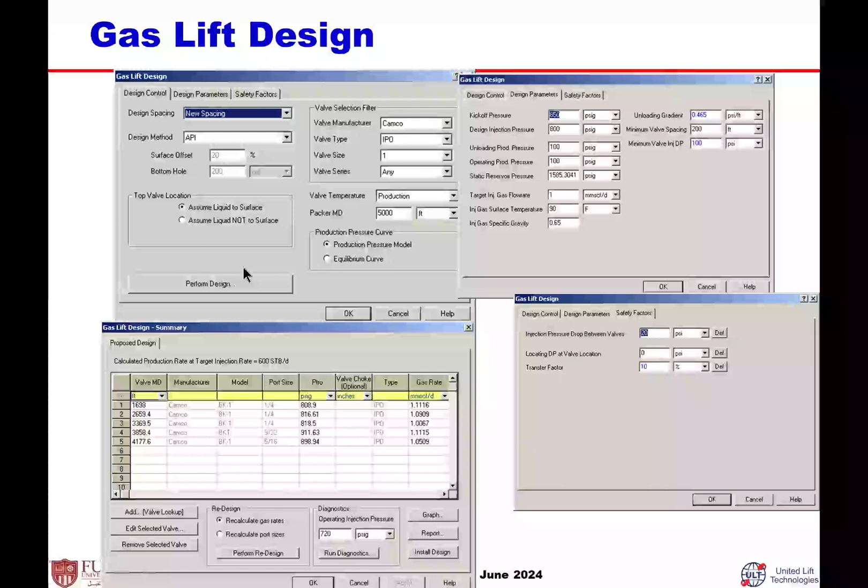And this is a screen showing input data and output data from one of the measures using one of the commonly used software like PipeSim and so on, and at the final, it generates something like what we are doing by hand, but more accurate, taking into consideration all the factors that you are not able to take into account using hand calculation.

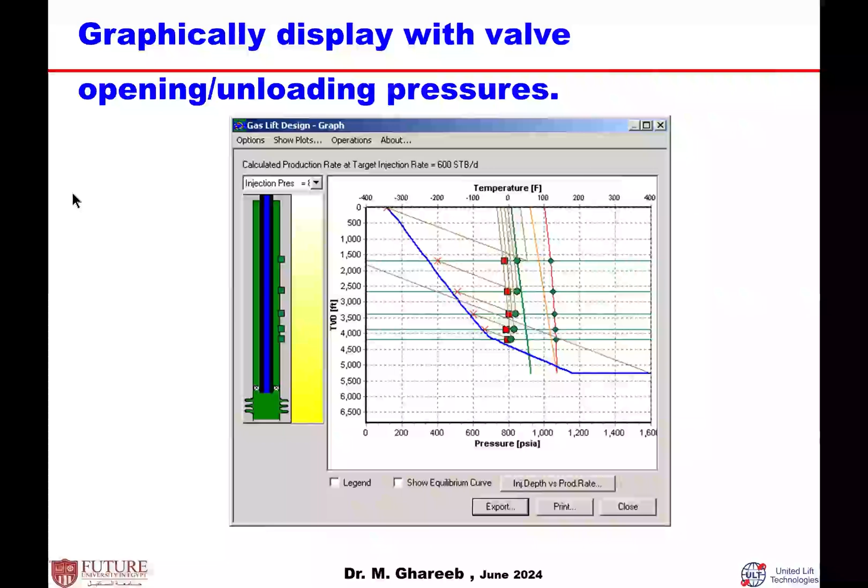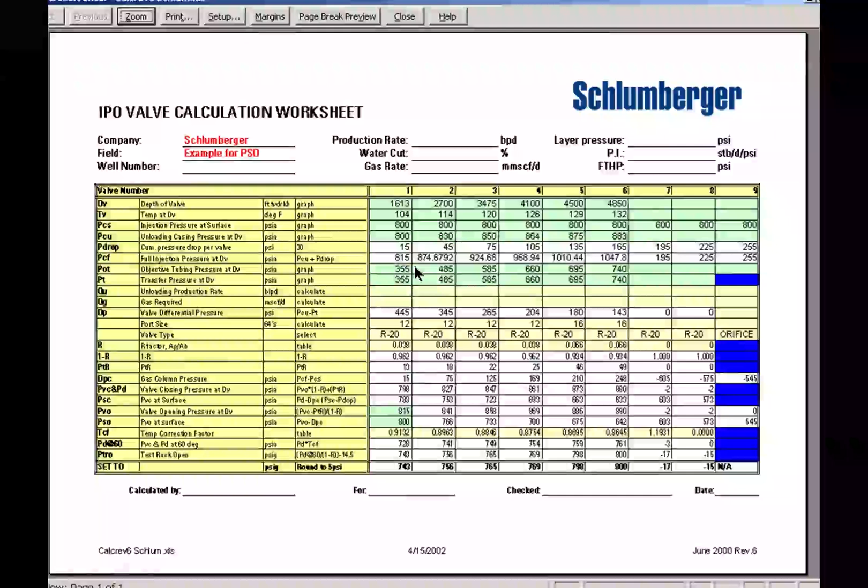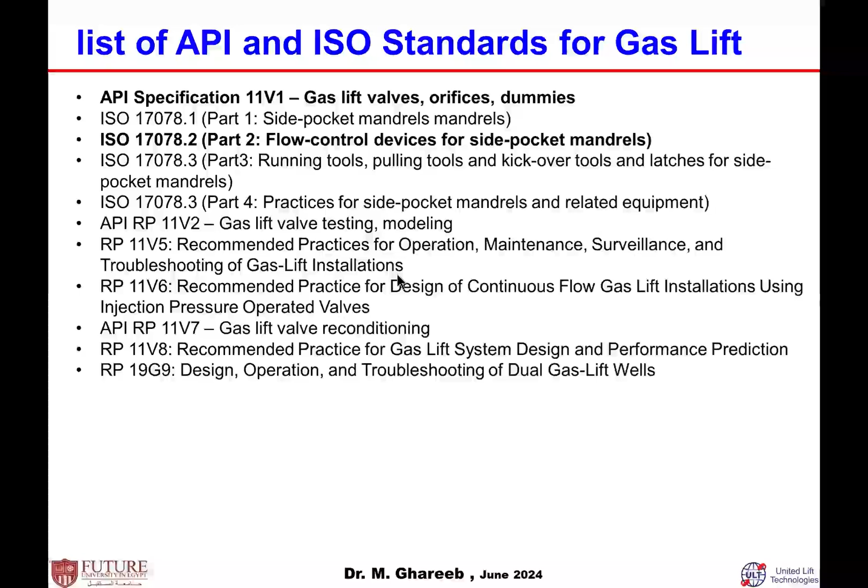For example, RP 11V6 is the recommended practice for gas lift system design. The one before the last is the recommended practice for gas lift system design and performance prediction, guiding how to design gas lift. For sure, there are some assumptions in these wells. It's not like software, but it can guide you in the design.

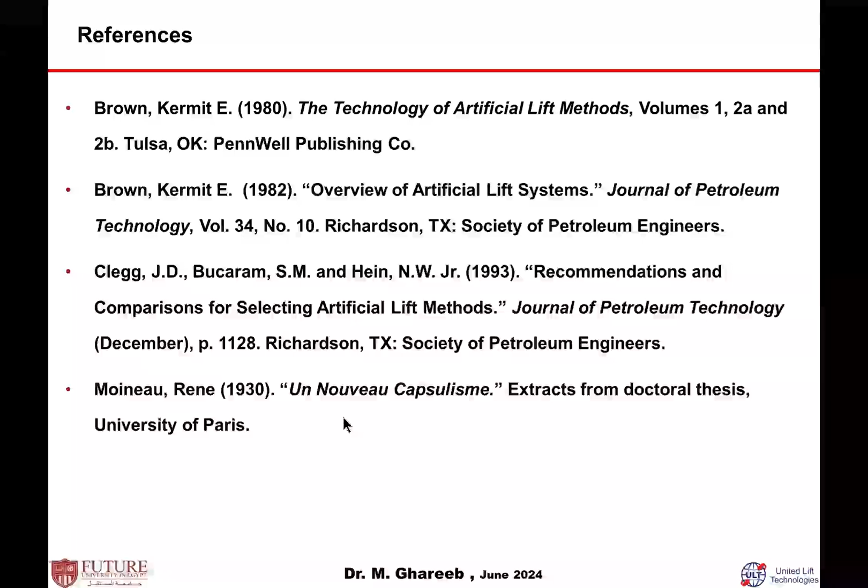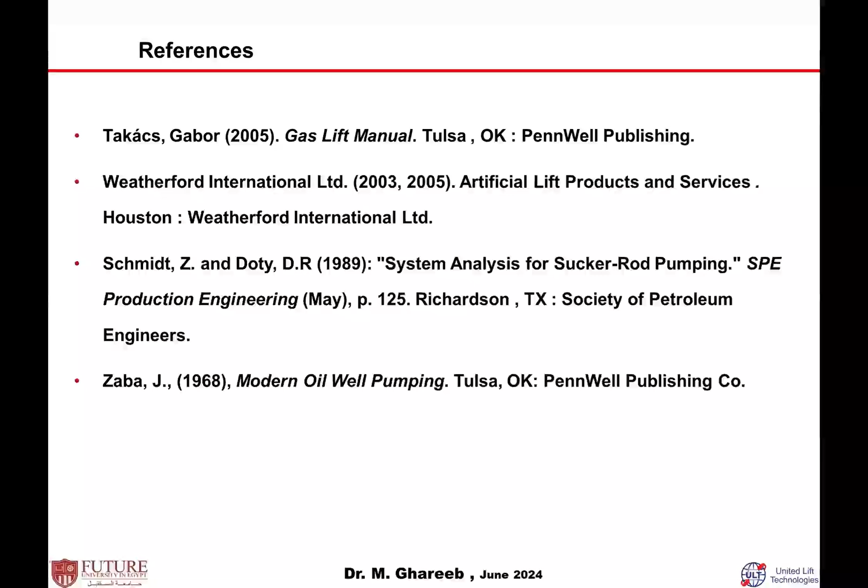There are several references you can look for about gas lift, gas lift system design, and operations. This is just very basic information about gas lift - how it works, how it's designed, and what the main equipment is. Gas lift is a big subject, but this is just the first step to understand and learn about it.